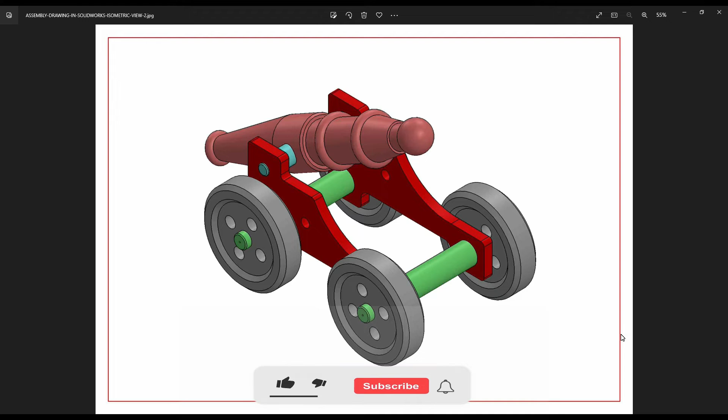Welcome to CAD station. Today we are going to draw a cart as you can see on screen. This is our cart. First we will design the parts and then assemble them to make this model cart. So let's start, here is our first part.

Let's start. First I'm going to part, and I'm going to draw in millimeters. It's up to you, you can select inches or any other unit you want. You can see this main part is 120 dia and its length is 440, so 120 by 440.

I'm going to take a right plane, sketch, circle of dia. Its dia is 120 and I have to extrude it up to 440. Okay, you can see it's 440 now.

Next is 90 and 90, and its dia is 82 mm. I'm going to again select right plane, sketch, control 8, circle from origin. This is of dia 82, so let's mention its dia as 82 and then extrude it up to 440 plus 90 plus 90.

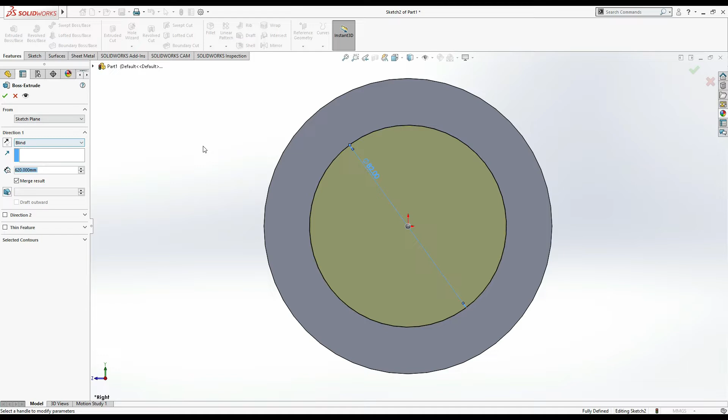Simply 440 plus 90 plus 90. Okay, one more thing, I have just missed a part. In boss extrude first, I have to extrude it by mid plane.

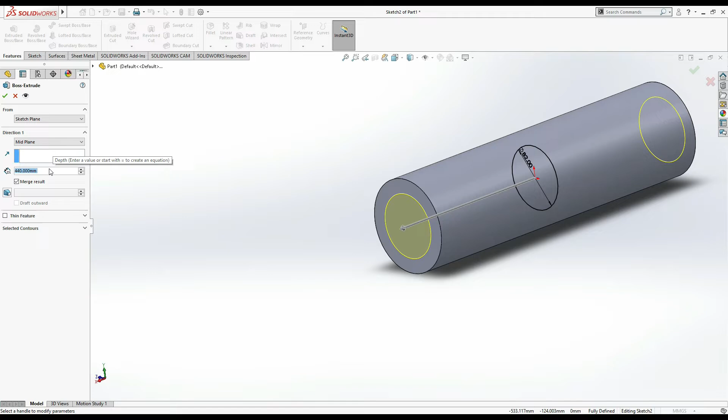No, that's right. Now next is exit from this sketch and edit sketch 2, simply go to extrude boss base. Same, we are going to use mid plane throughout our tutorial, and this one is 440 plus 90 plus 90. It will manage by itself.

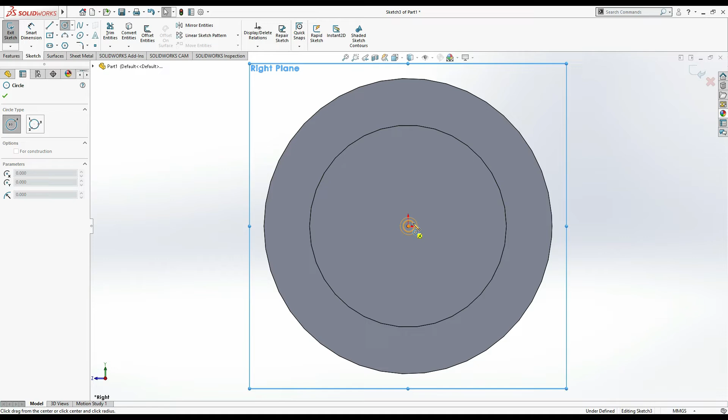Okay, now next is this final part, its dia is 78. So 78, again right plane, sketch, control 8, circle of dia, mention as 78. Okay, features extrude.

Now 78 and it is extruded up to 110, so simply add 110 in this, plus 110, and mid plane, so you can see.

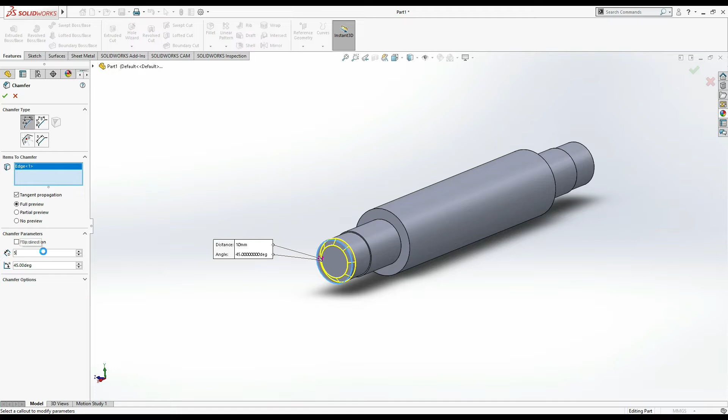And okay, now it's done. It's showing its edges are chamfer 45 by 5 mm. For this, simply go to features, go to chamfer, select this edge 5 mm, select this edge, and okay.

This one is done. Now simply change its color. I'm going to take this green, and okay, change its appearance, perspective, plain white, and again point.

Now control S to save this part. Okay, make a folder as cart, and in cart it's part 1. Okay, now part 1 is ready.

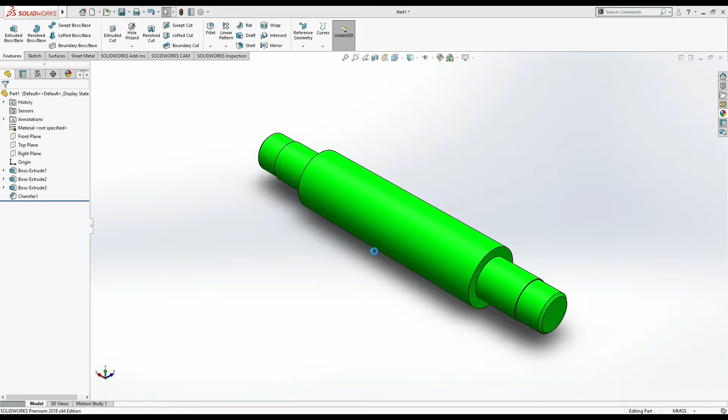Moving to part 2, which is this axle. First of all, its dia is 95 by 440. Same procedure, part okay, and same right plane, sketch and circle from origin, draw a circle, smart dimension, mention dimension as 95 mm. Go to features, extrude boss base is 440. Keep remind to change these to mid plane and 440. Yeah, it's 440.

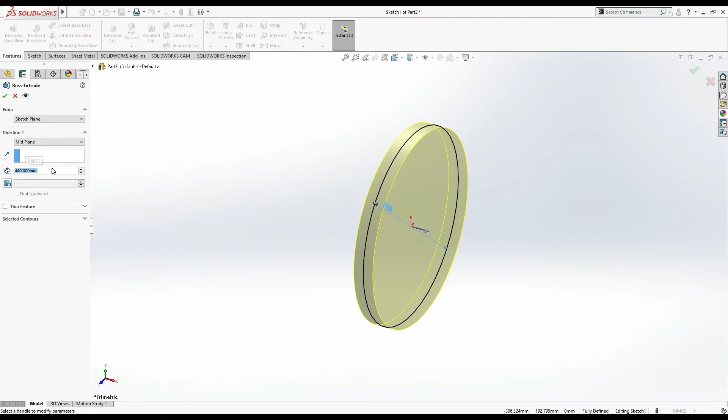Okay, now again right plane, sketch another circle from origin. You can simply draw from here or press Ctrl 8 to take it to normal. Its dimension is 50 dia and total is 560. So smart dimension and mention it as 50 mm, and total length is 560.

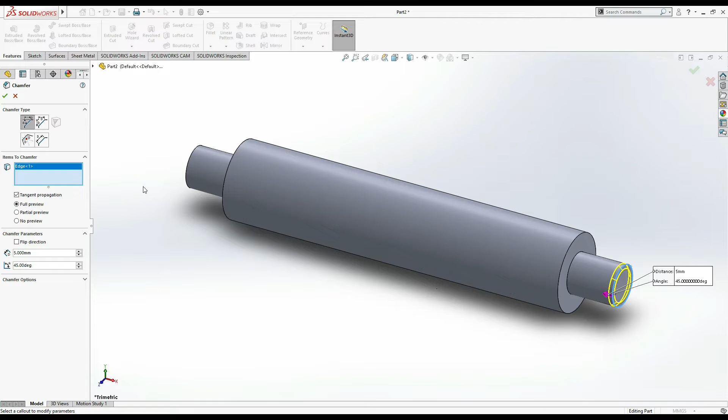So features, 560, and select mid plane. Okay, there is no chamfer in this. No, here is a chamfer of 5 mm and 45. So for this chamfer, select this edge, it's 5 mm by default, select this edge, and okay.

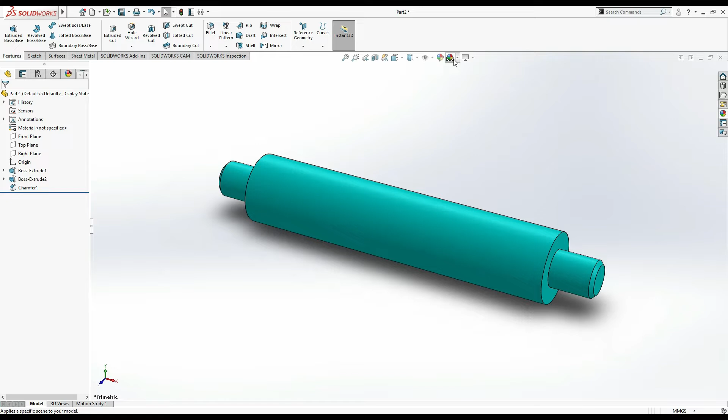Now change its color from edit appearance to this blue. Okay, this one is good. Go to perspective, plain white, and again, I'm going to simply isometric view and Control S. It's part 2. Okay, now close it and new part.

And the next part 3 is this support, right and left support. For this I'm again going to, now I can select front or right plane, it's up to me. I'm going to draw on front plane, sketch. To sketch this I'm taking this as my origin.

So let's just start, 1 circle, 2 circle, and 3 circles. These 2 circles are of same size, 80 mm, 80 mm. So I'm making these two, and these are 750 mm apart. First of all, escape, select these two, make relation equal. Okay, and smart dimension, its dimension is 80 mm and distance between their centers is 750.

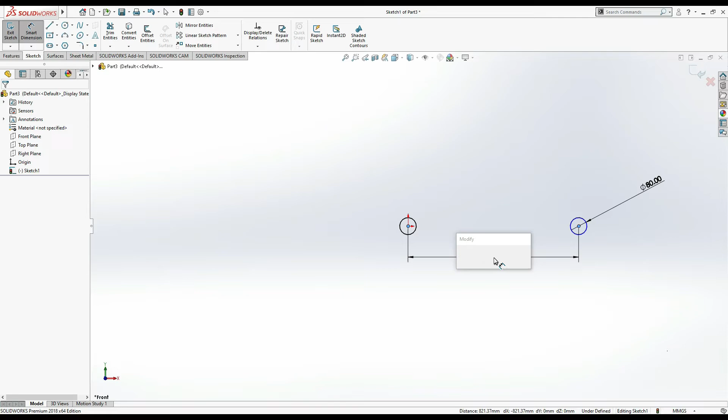Yeah, it's 750. Now I'm going to draw this outer sketch roughly. So I'm going to select the line command.

Using the line command, simple line. From here, vertical line, horizontal, again go to vertical.

Look here, now we can fillet this side. So I'm going to make it a sharp edge from here to here, again down, same here.

Now for the right side, this much, and this is, yeah, I'm going to just end this line.

Now this line, horizontal, vertical, and again horizontal. This step is basically a step.

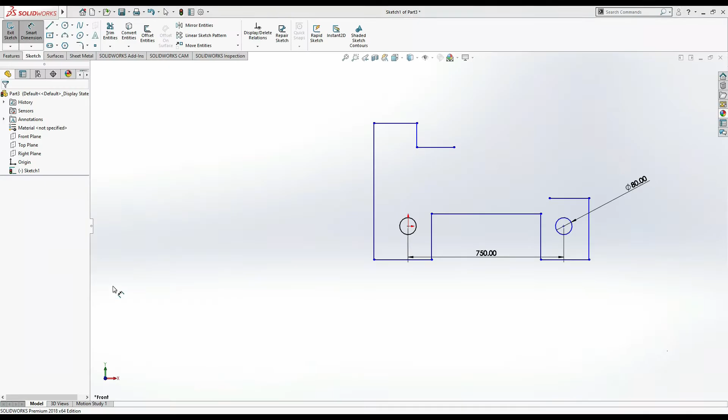One here and here, and now, okay, escape. Now smart dimension, make relations here as this total height is 500, so this one is of 500.

Okay, now next is 400, next is 550. Distance between these two is 550. This distance is of 550.

Okay, now next is this height is of 200, this height is of 200. Okay, and next is, let's find something.

Is 200 and is also 200, so this is of 200, and this should be of 200 as both are same, so it should be of 200.

Okay, one more thing, as you can see, for this I'm going to mention some relation as...

This height is 100 mm, so make this as 100 mm step by step. Smart dimension, this side is of 100 mm.

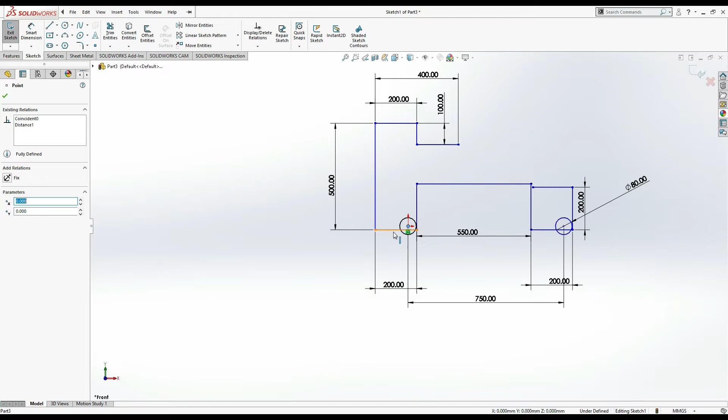Vertical, and now next is its height is 100 mm. I have put no, so put its height as 100 mm, 100 mm. Okay, this one is also of...

100 mm. Okay, next is find the distance as 300 and 400, 500. That means the lower distance you can see here is 100 mm, so we can mention...

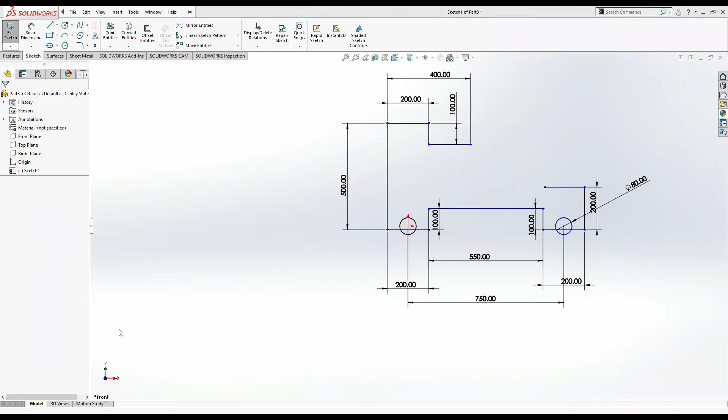As smart dimension origin, and this line distance is 100 mm. Now it's done. Next is we have to draw this circle, sorry, this circle, and so make a circle.

Circle, horizontal, vertical to the lower circle, and its dimension is 60 mm dia, and distance between these two circles is 300 mm.

Here to here is 300, and there is one more circle which is of 50 mm. Circle,

Select circle, just roughly one smart dimension. This is of...

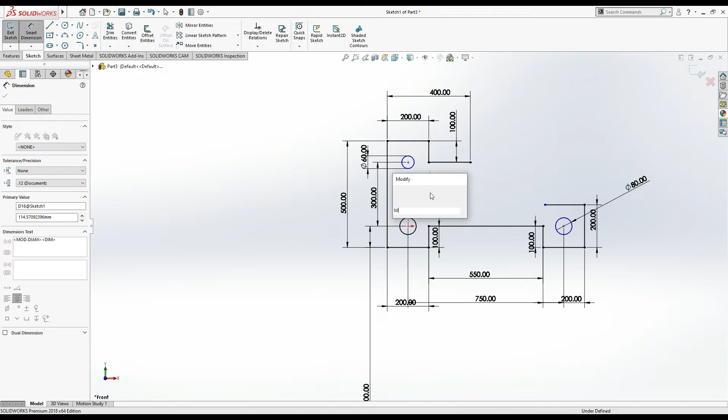50 mm dia. Next is it's 150 mm from this center of circle, 150. So from this center to this center height is 150.

And one more thing, the distance between these two circles horizontally is 250. So from here and this is...

250. Okay, now next is to make an arc here.

This arc is of 380 mm radius. Arc, simply I'm going to select arc from here, center point arc or...

3-point arc. It should be good to, okay, center point arc.

Let's try center point arc. I'm going to select center point arc from here. I'm going to select here and here. Okay, now mention its dimension as 380 radius.

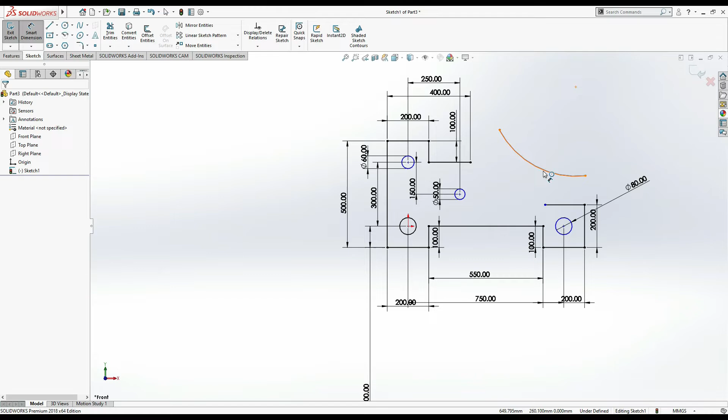Its radius is 380. Okay, now escape, select this point, press Ctrl, select this point, and make merge, and...

Okay, enter. Now select this point and press Ctrl this point and make relation merge. Okay, now this is done.

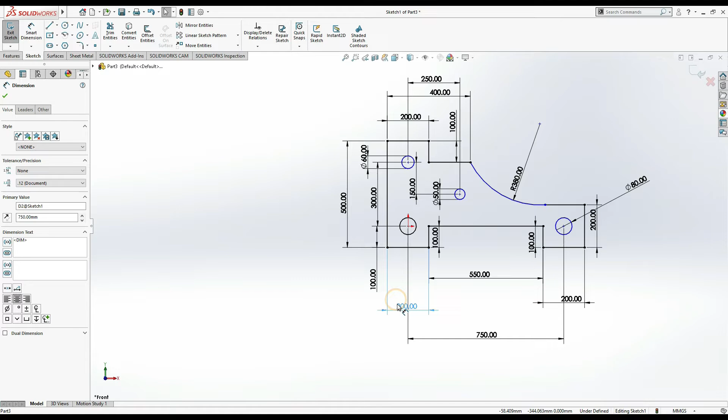Now only thing left is the fillets. First make it clear so you can understand these dimensions.

Okay, hope so you can understand these all. First of all, where is this, 20 radius of fillet, 20 first go to features. Oh okay, sketch fillet.

Fillet, this one and this one, of how much is this? It's 20 radius, 20 radius. And okay, now next, one is done.

Now find the next one. Radius is here, radius of 40, this one and this one, 40. Make 40, this one and this one.

Okay, now next is this is 20, so that all are of 20. Again make 20, this one, this one, this one.

Okay, no problem. This one, this one, this one, and the last one. All has been done.

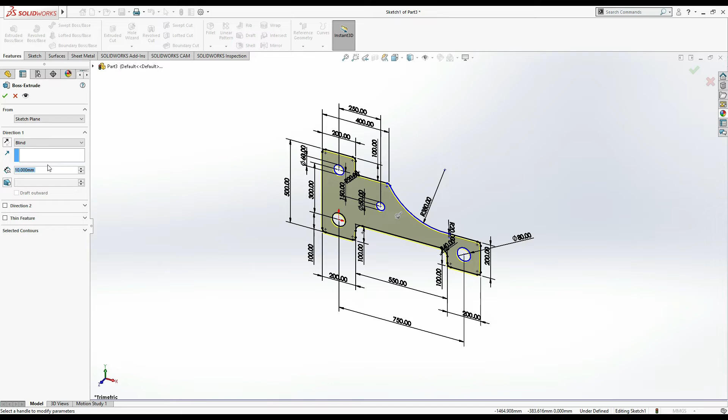Now all has been done, so we can extrude it up to 50. Features, close it, extrude, extrude up to 50.

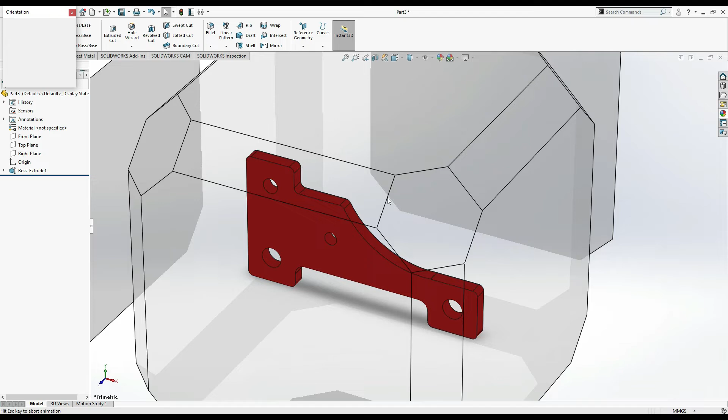Now this is done. Simply change its appearance, it's going to be red. Perspective same to same for all, plain white and 3-point fade, zoom to fit and isometric. It's done. Control S, and it's part 3 of our cart.

Close. Now next is part 4, which is the wheel. For wheel, we are going to draw first. Let's select part, and we are going to draw on front plane, sketch.

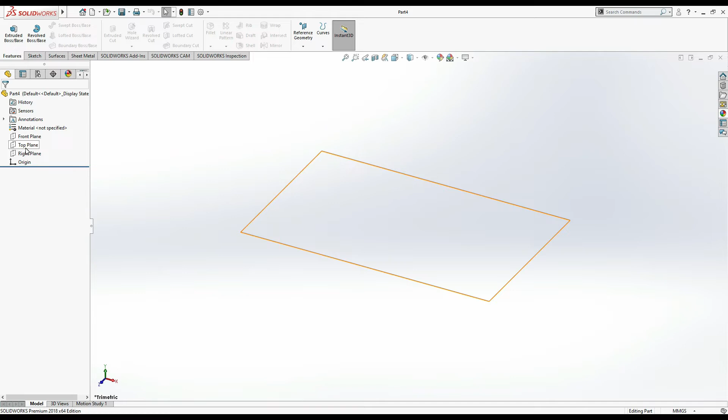For wheel, first we are going to draw this inner circle, one circle. For select circle, make another circle for this construction, and make 4 circles over it. Third circle, and the last one is 4 circle. Escape, select these 4 circles and make a relation equal.

Now give them dimensions, as the inner one is of 78 dia. The construction circle is of 200 dia, this one is of 200, 200. And these circles are of 62 dia, 62.

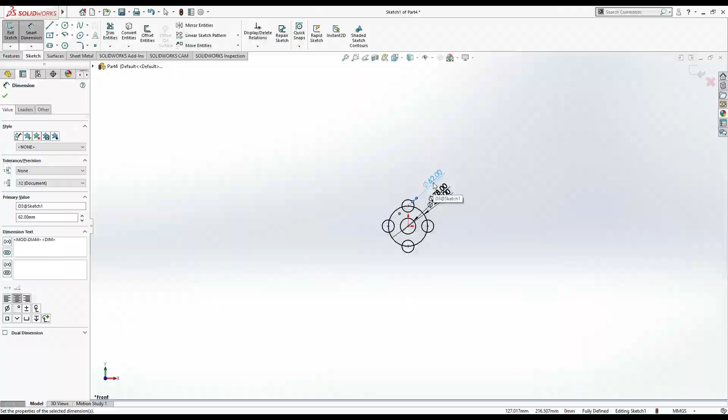And the outer dia, this one is of, let's find, it is of 340. It's of 340. So another circle from origin, and its dia is 340.

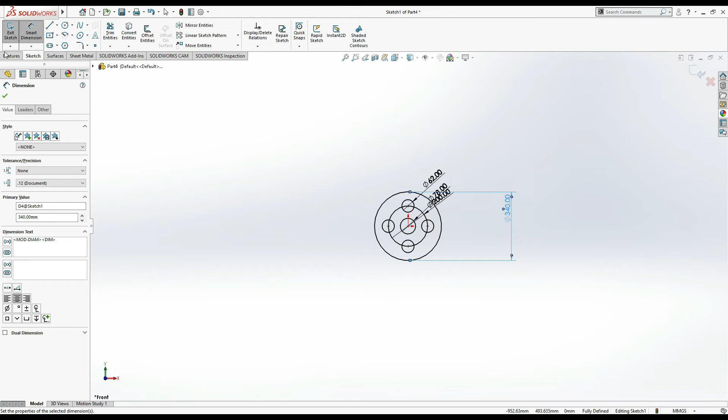I'm going to extrude it up to 90. Features, extrude, and mid plane, select contours, this one and this one, and 40 and 90. It's of 90, and okay.

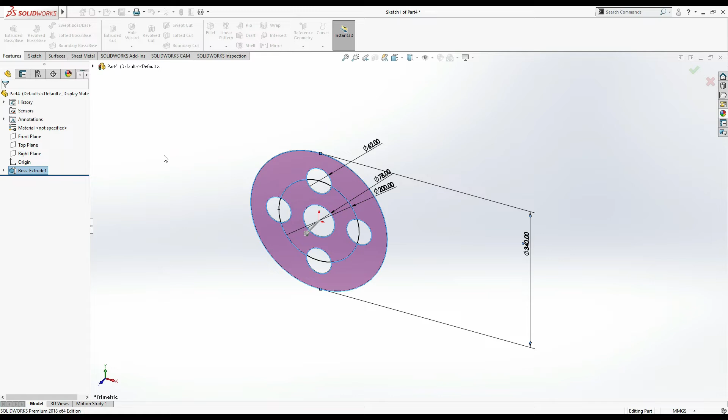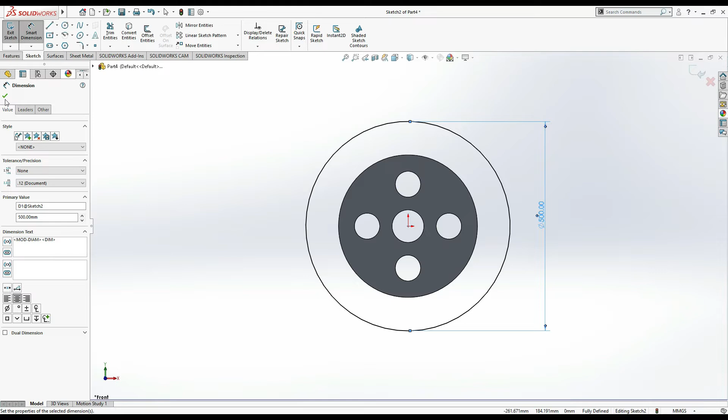Now next is again front plane, sketch, control 8, and now the final one is of 500 mm. Simply circle from origin, and its dia is from smart dimension. It's of 500 mm. Okay, features extrude boss base.

The total is of, we can find the total width from here. It's 20 plus 20, 40. That means total will be 130. Extrude it up to 130 mm from mid plane.

One more thing is left, as control 8. Select again circle, make a circle of same. Now we can extrude 90 and it's 130.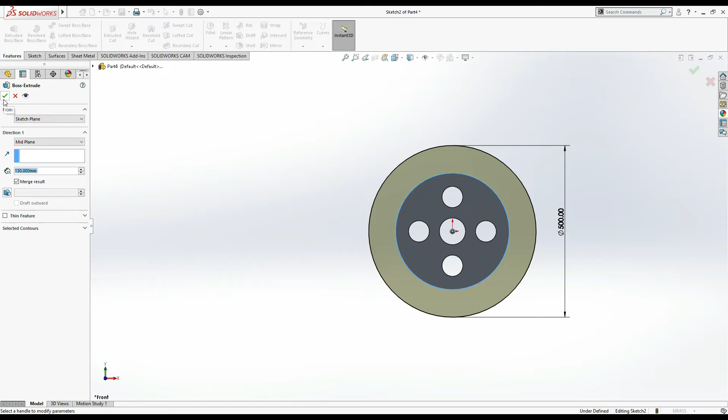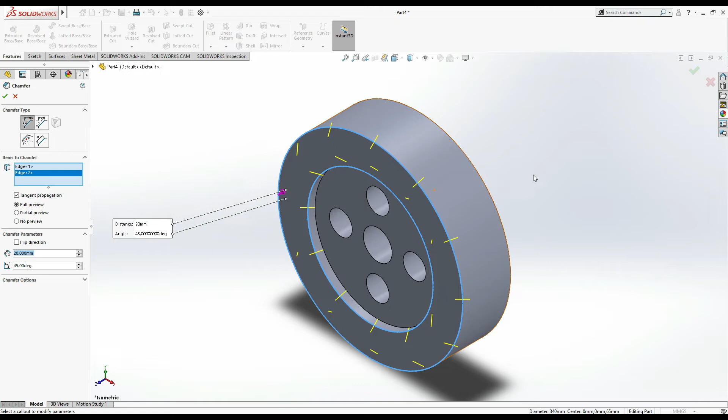Now finally we are going to chamfer these, this side, and the outer one similarly, rotate and mention it as 20 mm. Rotate it. We have to chamfer this edge and this edge. All are of 20 mm.

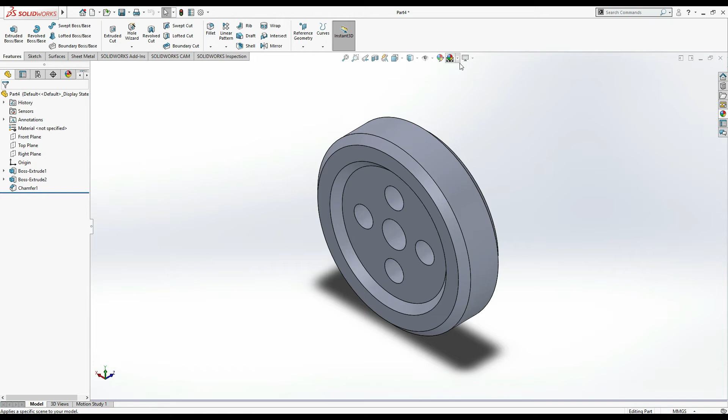Now this wheel is done. Change it to isometric view, change its color preference, this black. Perspective and plain white, and then 3 point. Now it's done. Control S, part 4.

Now the last, I think yes, that's the last part, part 5. We are going to draw these. First we are going to sketch circle from origin. This one is of smart dimension, its dia is of 110 mm, and we have to extrude it up to let's say it's 4 mm.

So simply extrude it up to 4 mm. Okay, we have to extrude it up to 4 mm. It's not 10, 4 mm.

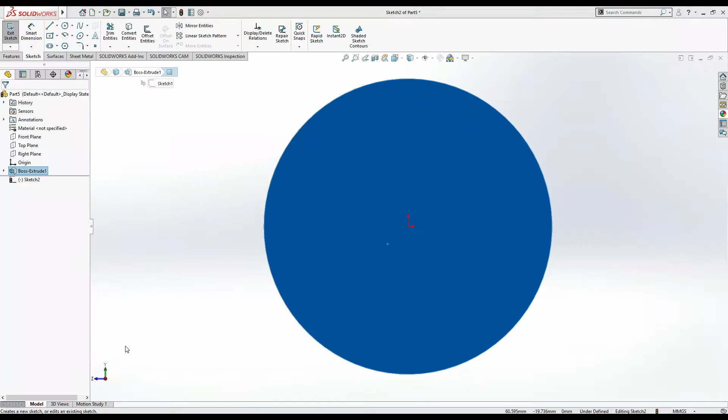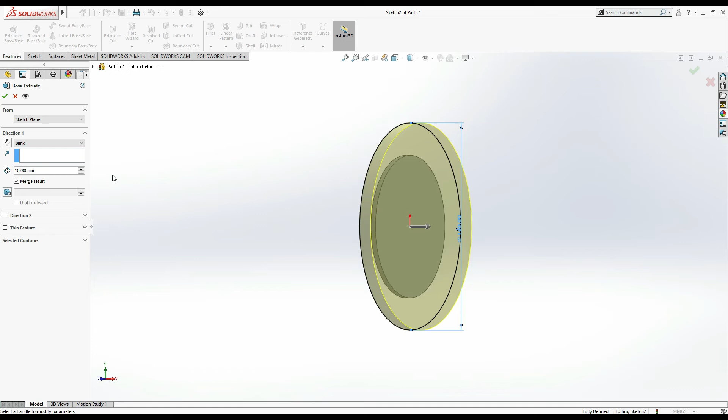Now next is select this part, sketch, control 8. Next is for this it's 160, circle, same from origin, it's smart dimension, it's of 160 mm, and extrude it up to, we have to extrude it up to it's 25. That means we have to extrude it up to 50. 25 plus 25, we have to extrude it up to 50.

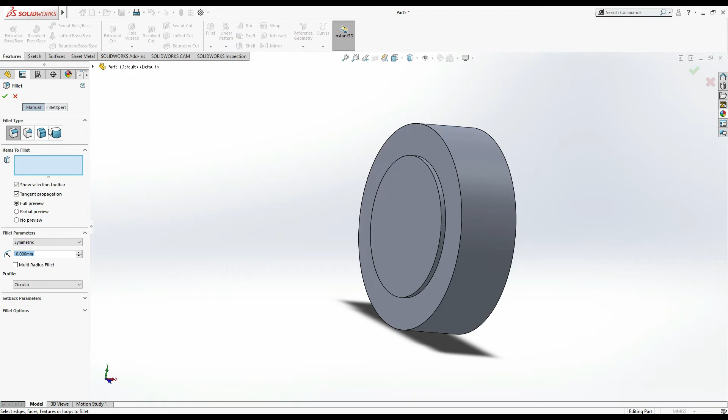And okay, now next is we have to make its fillet. Simply fillet, I want complete. Select this face, for this select this one, and the last select this face, and okay, it's filleted.

Now next is this side, as it's 250 mm dia and it's 550 mm apart. So I'm going to take a reference plane. It should be of 550 plus 4. Let's see, it's 550, it's 550 mm apart. So reference plane from right plane at a distance of 550, and okay.

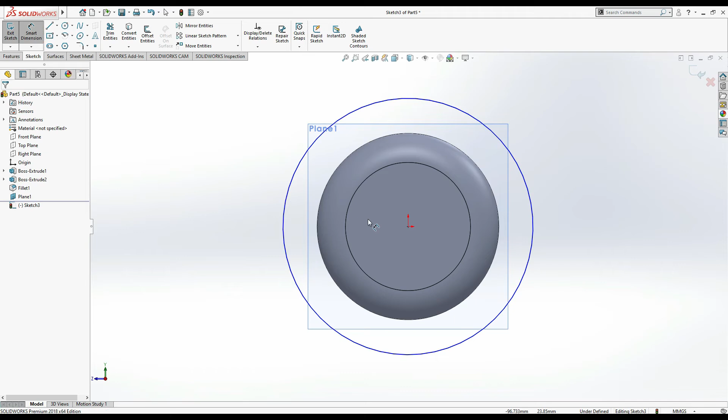Simply sketch, control 8. We have to draw a circle similarly from origin, and its dia is 250 mm. Smart dimension is of 250 mm dia. And circle, draw a circle from where we have to extrude. We want to extrude from here.

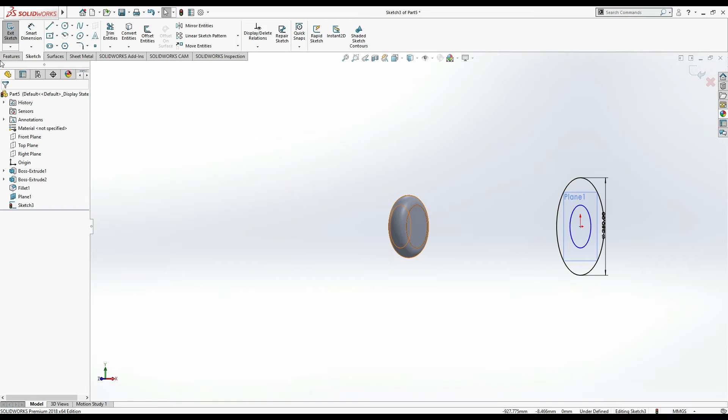And one more thing, it's done. Let's see, we have to draw a line, but first let me show you. If I want to exit a sketch, we have an option lofted boss base. Okay, this circle I've made by mistake. Delete this. Okay, I have to simply convert its entities. Sketch, convert it into this.

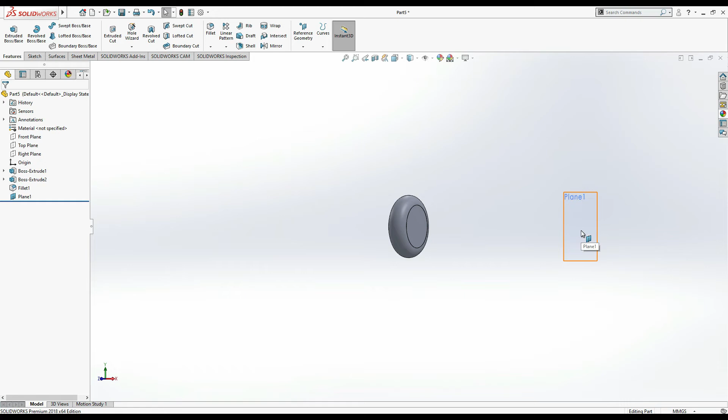Okay, we will draw here. Features, lofted boss base. It's asking me two profiles. I have one profile here, but not here. For this, okay, I have deleted this from here too. First, sketch here.

Circle from origin to this inner circle. Now escape, select this plane, sketch, same thing as we have done, because I have deleted this by mistake from origin. Its diameter is...

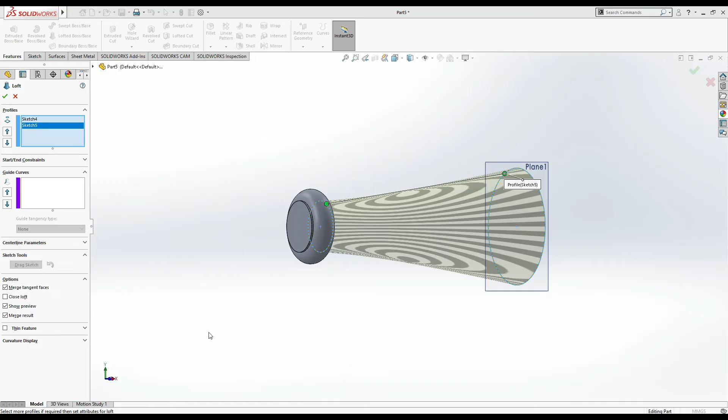250 mm. And now next I have to draw, see, if I go to lofted boss base, I select this sketch, and this sketch is going to be extruded, and you can see it's same as this one. So I'm going to okay, but you can see if I just rotate it, it's not going to be straight for this. I'm going to control Z.

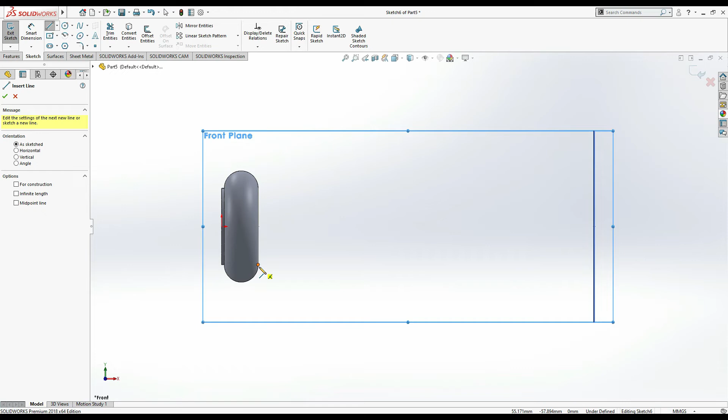And the one more thing which is important, I am selecting front plane, sketch, control 8. So let's see, line command from the edge to the circle edge. Okay, now exit sketch, and again lofted boss base. Guideline has been selected. Now for this sketch, select this circle and this circle. Now see the difference, it's smooth. That's why we have to make a direction line, or you can say hide this plane, hide.

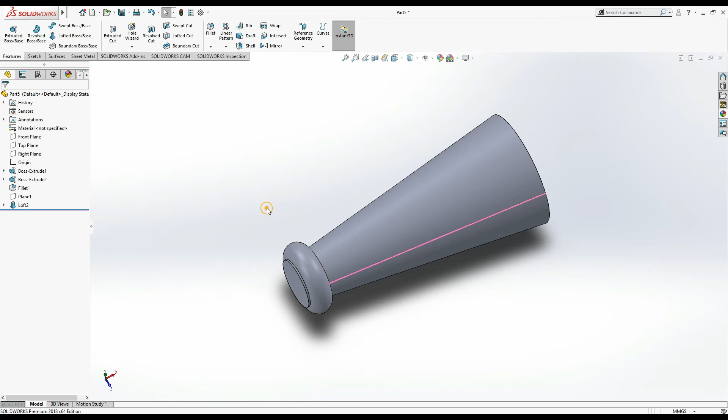Okay. Now next this extrude is of 200 mm. So extrude it. Features, edit sketch, convert entities. Features, extrude up to 200 mm, and okay, it's simple.

Now next there is a step. For a step, I'm going to simply draw 80 mm, and its step is to find the diameter. It's 200 mm, so it's easy for us. Control 8, sketch, circle of 200 mm. Its dia is 200 mm.

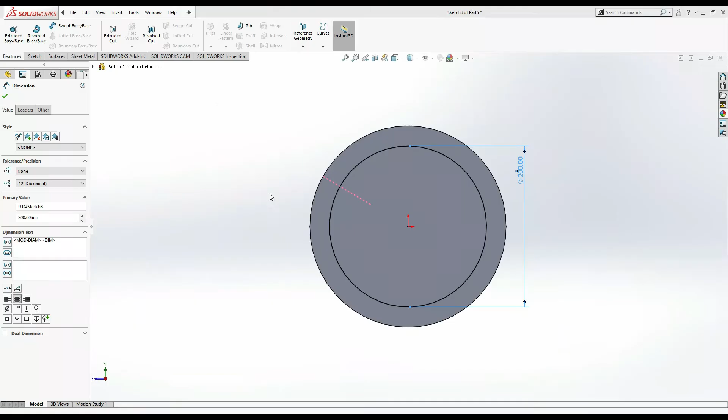Okay, and features, we have to extrude first is of 80. Simply extrude it up to 80 mm, and okay, say it's extruded.

Now select this face again, sketch, and now the next circle is of, where's the dimension, it's same, 200.

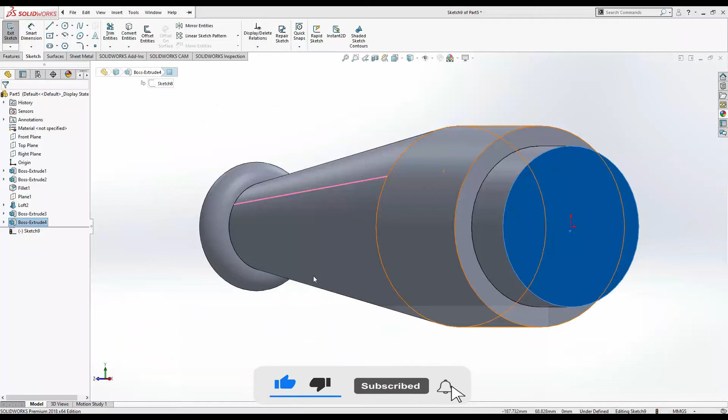And the next is this fillet should be of 25 and 25, that means 50. So 250, we have to make a circle of 250. Circle from origin, smart dimension, and it's of 250 mm dia, and extrude up to 50. So we can fillet it.

Again select this sketch, circle from origin, and it's of 200, and we have to extrude up to, this one is done. Now this is 200, we have to extrude up to 200. And okay, next is again a step of this fillet, like so.

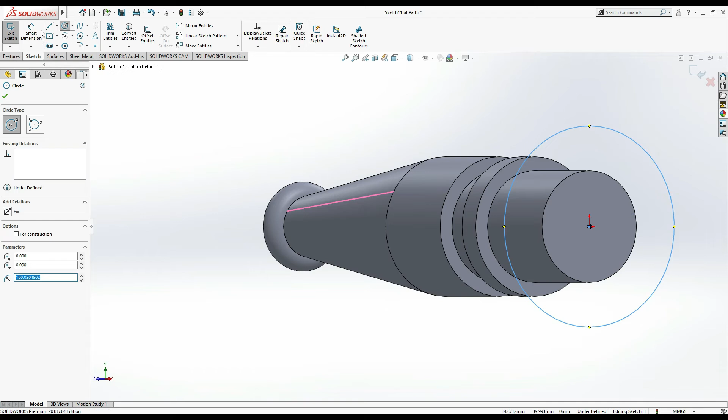Again sketch this face, sketch, circle, select circle from origin, this is of 250 mm, 250 mm dia, and we have to extrude similarly 50 mm. So it's 50, it's not 500, 50, so it can be filleted.

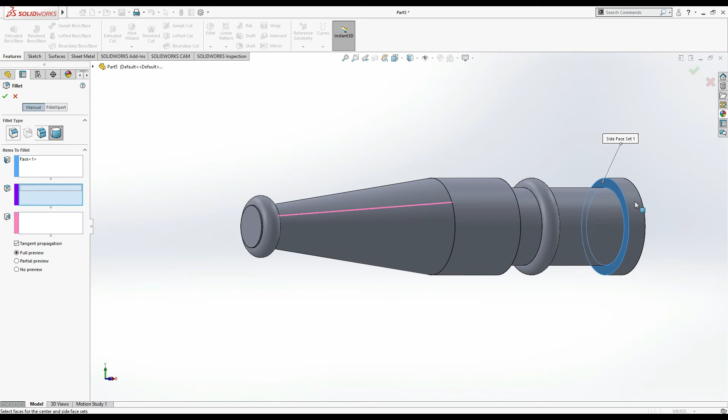Now the next is for this we can simply do 150 mm, and it's at a distance of 150 mm. So I'm going to select, now I'm going to draw fillets, fillet of the same as the last one, full round fillet, this edge, next this upper edge, rotate it, last one this, and okay, again fillet, this one, next selection, top face, rotate it, last one, okay, and yes.

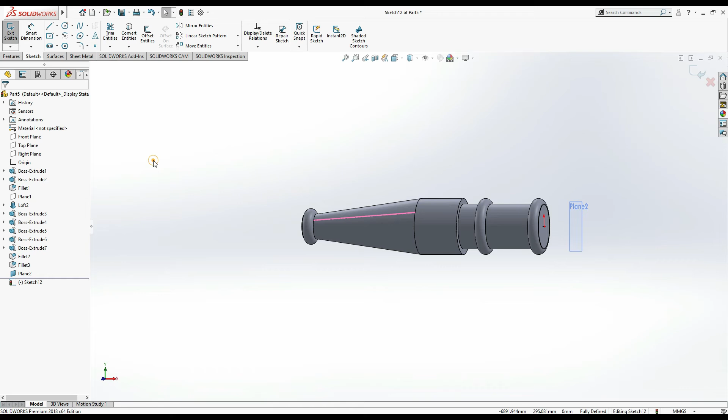Now select for this circle 150 mm, I'm going to reference geometry plane from here 150 mm distance, and okay, select this one, sketch, convert into this, sketch, and convert into this. Now it's done, exit sketch, select this plane, sketch, and control 8.

Now for this I'm going to draw a circle of 140 mm from here to here, smart dimension, it's of 140 mm. Okay, next it's very smooth for this.

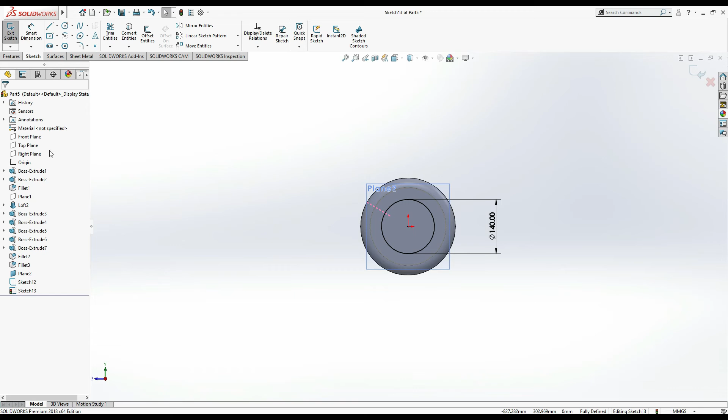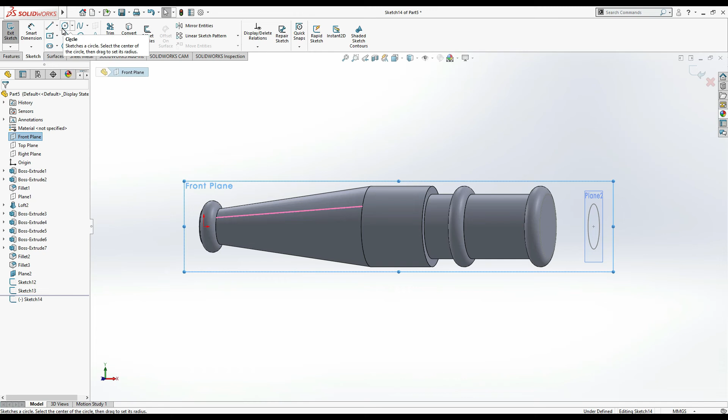Top plane, or I can select front plane, sketch, control 8. No, I'm going to take this front plane, sketch, control 8, line command, zoom here, so it's easy to make. From this edge find the edge, from this edge find the edge of circle, here is the circle, okay, skip.

Now again same feature, lofted boss base, the guideline has been selected for this, like this circle, and the one more, okay, now it's done. Only...

Next is this is of, let's find here the same height from here to here, same is 110 mm dia. For this select this face, sketch, circle of 110 dia, and features, we have to extrude, but how much? 57, it's here. Extrude up to 57. Okay.

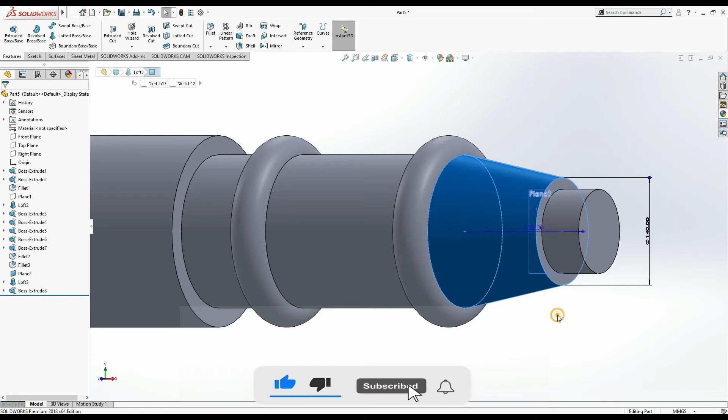Select the plane and hide it. Next is this dome. We can make this dome, it's quite simple. Select this face, insert, features, here's the dome. Increase its distance 100 mm. Now it's looking good.

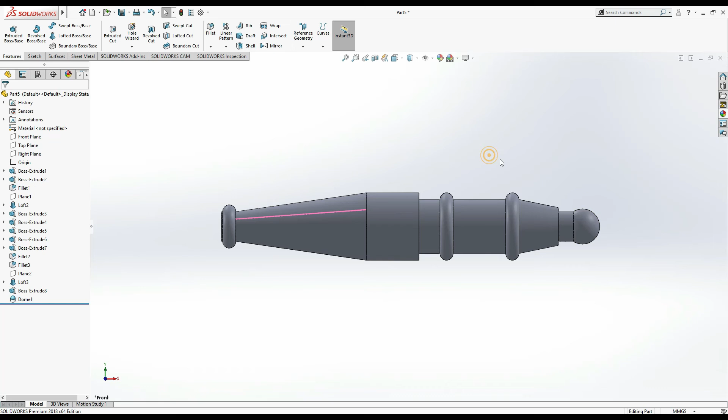The next step is isometric view, and change its appearance. Okay, this pink color is showing our line. We have to hide it. We can hide it, but not now.

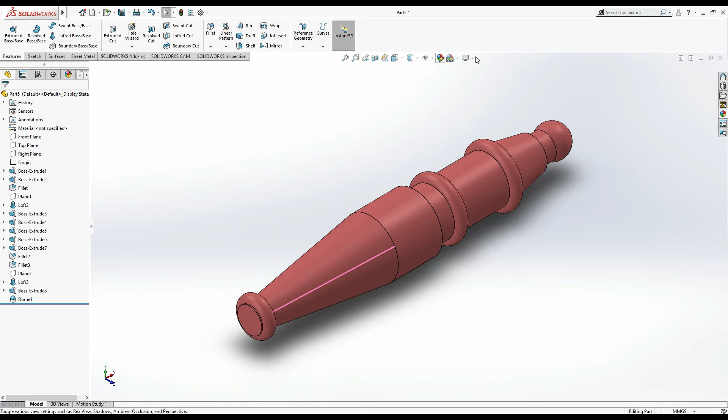Go to perspective, select perspective, plain white and 3-point fade. Now it's done. Control S, downloads, and here is the card.

Everything is done. Now come here, assembly. We are going to start assembly, so new, select assembly. First I'm going to insert this red colored part, which is the support. First cancel. The most important step in assembly: go to visibility and view origin. Now browse part 3 and put it on origin here.

If you want to put these both origins on each other, just move your cursor to these. It will automatically fix your both origins. Okay, now it's done. Next is to copy. For copy, press Ctrl, select this and just move it, then escape Control.

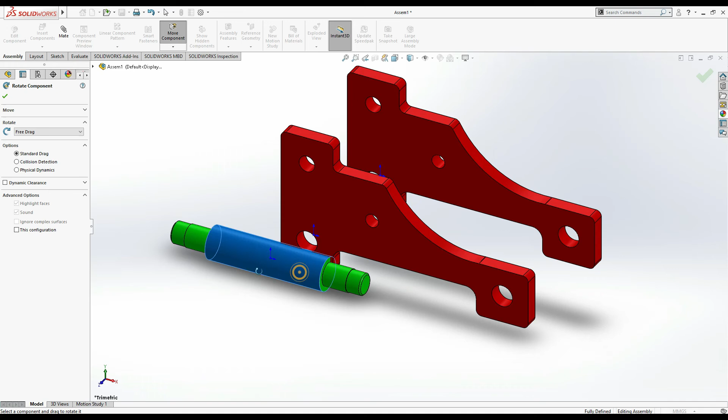Now next is this green colored axis. For this, go to assembly, insert component, this green colored part 1. Move component, rotate component, and rotate it. For now press Ctrl, click over it and copy it.

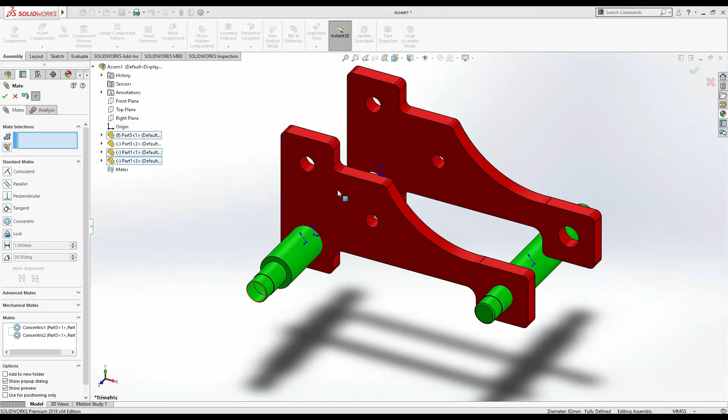The next is mate. We have to mate this one, concentric, this one and this one, concentric. Next we want this one and this one to be concentric so it can move, this one and this one, so it will be concentric.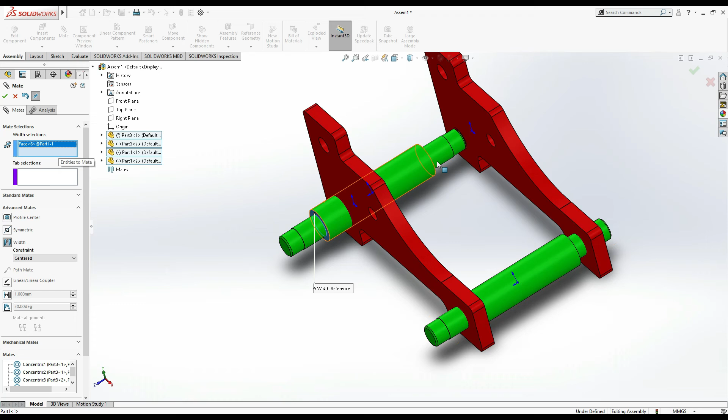Now select this part. First go to advanced mates, width mate. Now face 1 has been selected, rotate it and select this face. Now for this one select and this one, and okay.

Similarly, again width mate, this side, rotate, select this. Now next select this one, rotate, press alt, and hover over it.

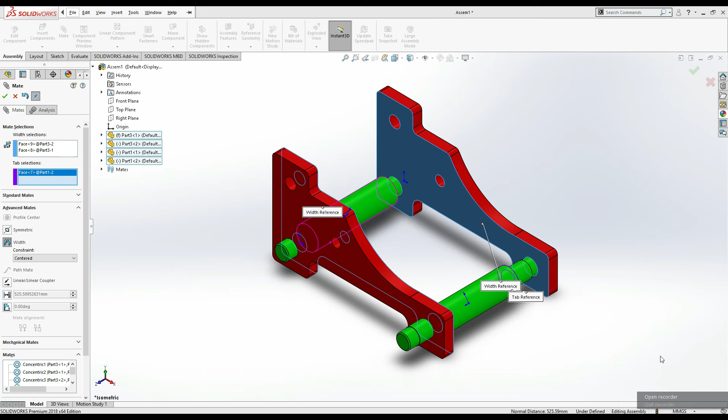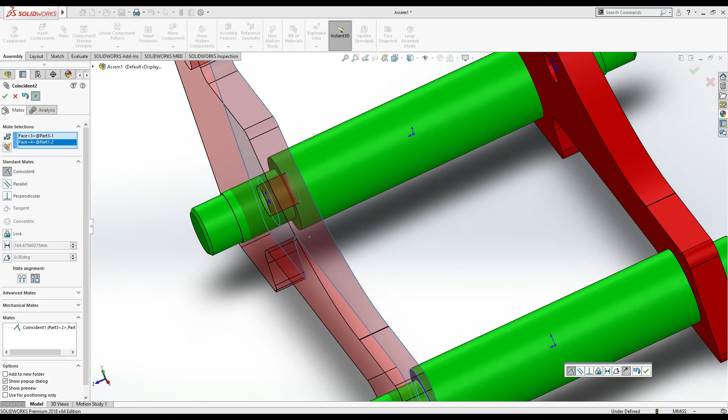Now we are going to mate this, select mate. Select this face, this one. Now select this face, rotate and select this one. Next is the same, select this face, select this one, and okay, it should be done by this side.

Now you can do it as mate, select this face, select this one, and okay, now mates have been done.

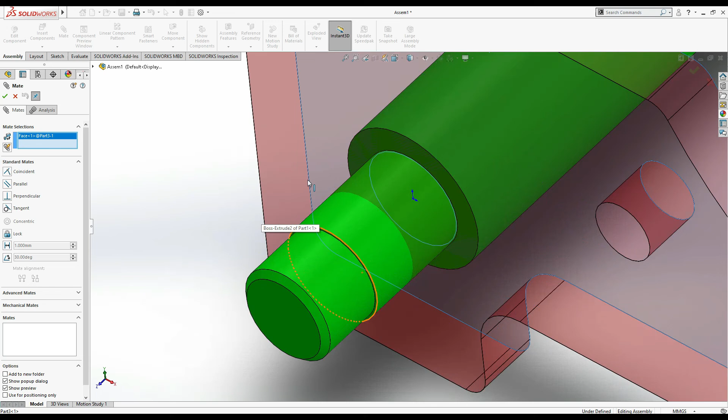Next is this blue colored shaft, for this insert component, part 2, put it anywhere, go to move component, rotate, and rotate it like this, escape. Similarly mate this one and the top one.

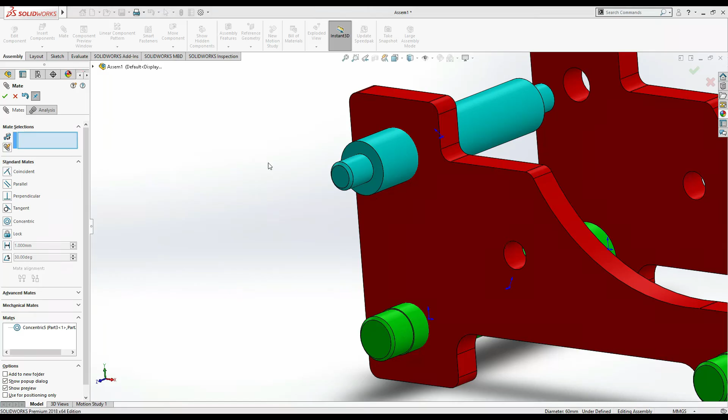Select this, no, escape, again go to mate, select this face, yeah, now that's right, select this, and okay. Now the next is, you can see it's this one, select this one, rotate, and select this one. Okay, now it's done.

The next is this last part 5, for this insert component, part 5. Okay, one thing we have left, yeah, we have left one thing, skip, open part 5. We have skipped a step.

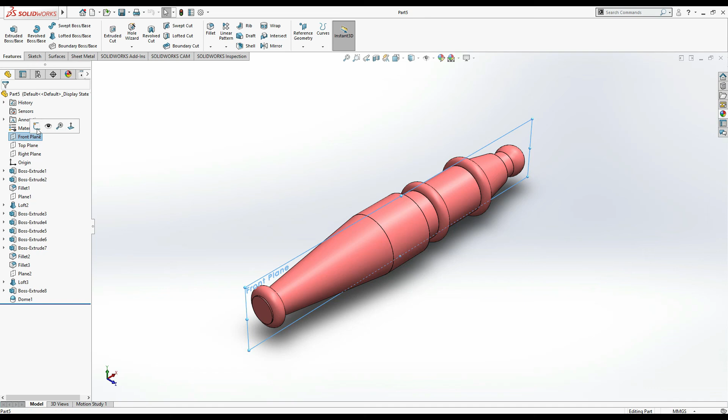Here is a hole of 95 diameter for this front plane. Sketch, control 8, circle, find the midpoint, here's the midpoint, make a circle of 95 mm diameter, 95 mm, and go to features, extrude cut through all both, and okay. Now press Ctrl S and close it.

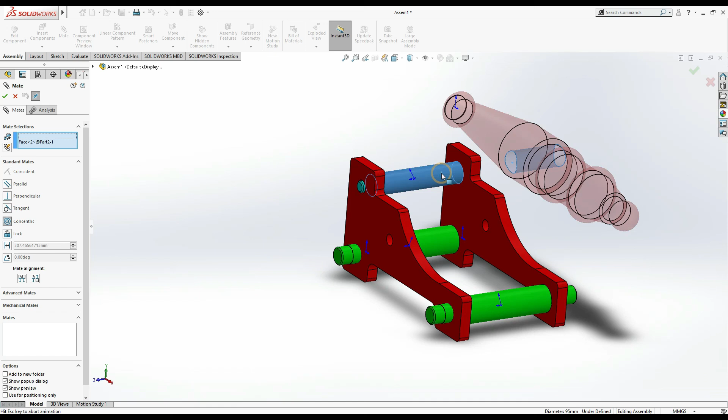Again insert component. Now select part 5, and here is a hole for us. Mate this one and this one, okay, and here it's done. The next is, no, insert component, our wheels, part 4.

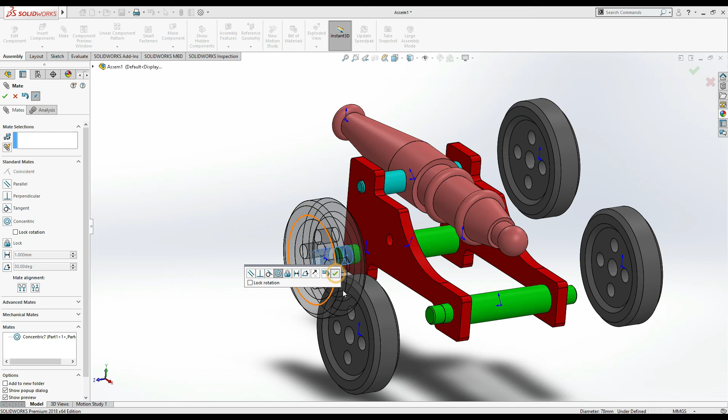First copy it, 1, 2, now 3, and press Ctrl and here 4. Similarly mate this one and this one, concentric, okay, this one and this one, okay, this one and this one concentric, all are concentric, okay, this one, rotate it, and this one, all are concentric.

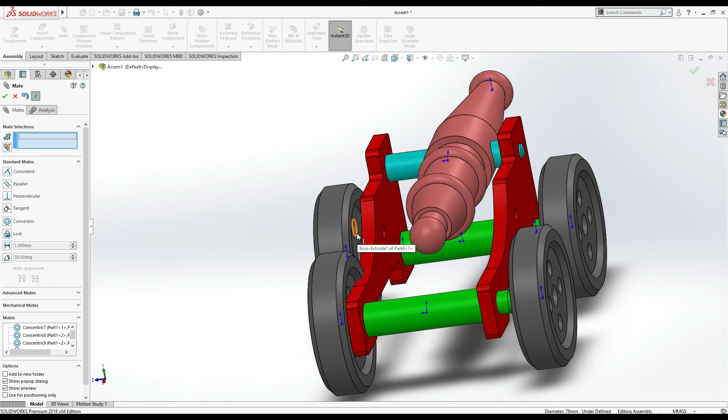Now next is, rotate it, select this face, rotate it, zoom this one, and okay, let's see. Oh no, we have to put it right here.

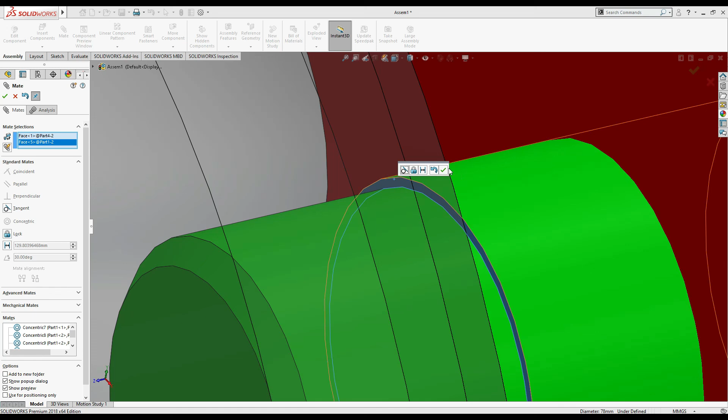Close this origin and make this all the same. Take it out here, select this one, rotate, zoom it, this face, and okay, I have made a mistake, not the face, we have to select this side, and okay.

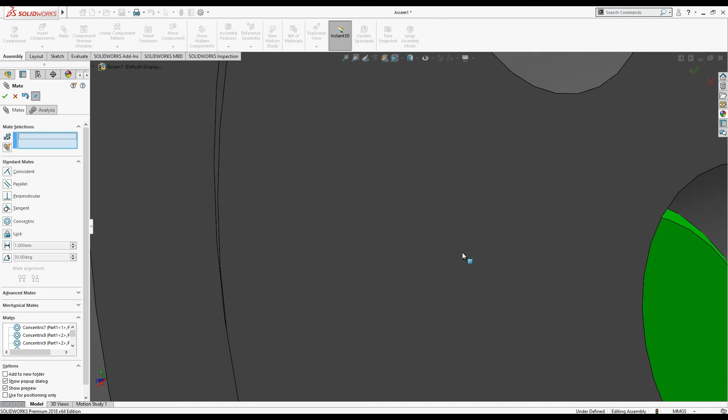Now next is this one. Select this one. Similarly, select this, zoom and select this. All have been done.

Now our isometric view, our cart is ready. It shall be moved.